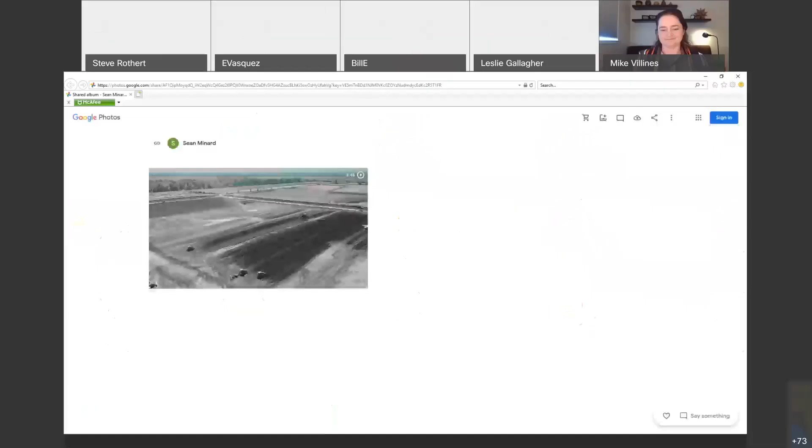Okay, members, we're back on item 8A, and this is a follow-up to the report Steve did on the Lower Elkhorn rehabilitation project that he was talking about. And here's a little video. Okay, Ryan, whenever you're ready.

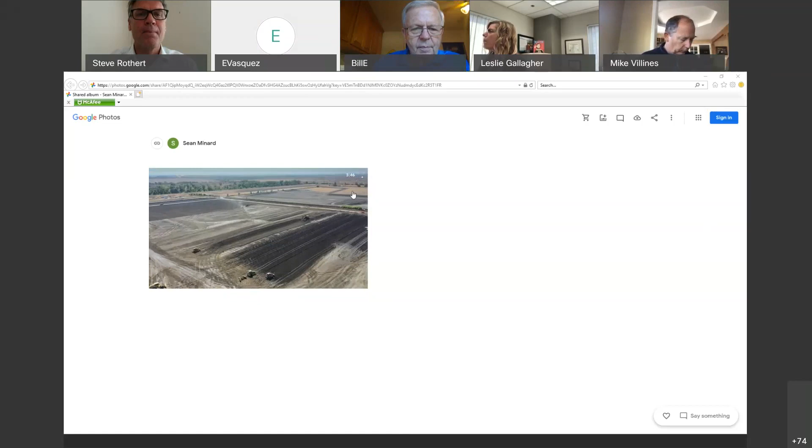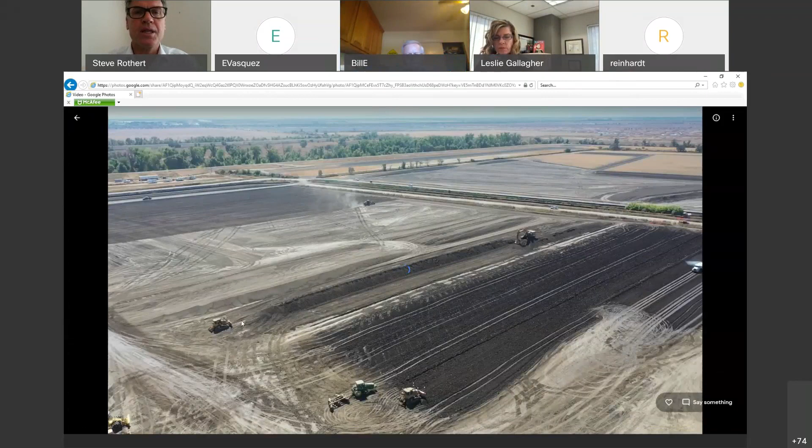So from this view, and hopefully it'll start moving, we are looking southwest with the vegetation in the background being the Barrow Canal along the Sacramento bypass and the northern levee of the Sacramento bypass.

And... let's see, I'm only seeing black. Others are seeing more. So the preview works, but when I go to play it, I'm not getting it. Well, I wonder. I don't want to take too much time. So yeah, it doesn't look like it's going to go forward.

But I'll just say two things about what we're seeing here in a loop. As I mentioned, the vegetation in the background is along the bypass side of the northern levee of the Sacramento bypass. Farther out, you can see a smaller strip of vegetation, which is the vegetation along the Tule Canal, so that's where the current Yolo bypass east levee is.

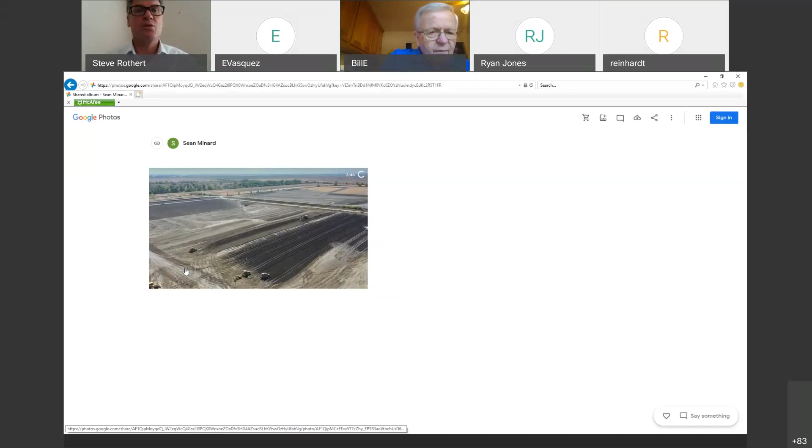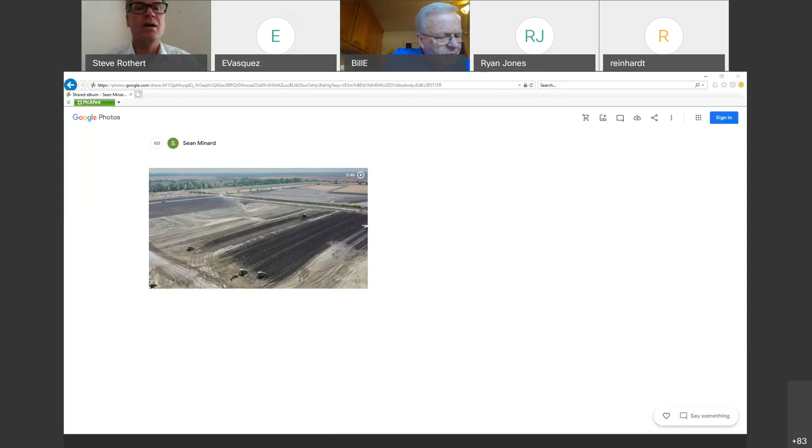So I think that's about all we can squeeze out of this for now, and maybe in future updates we can provide a better video of the progress as it goes forward. So apologies for the technical difficulties here, and I appreciate the opportunity to come back to it for at least a moment. Okay, thanks, Steve.

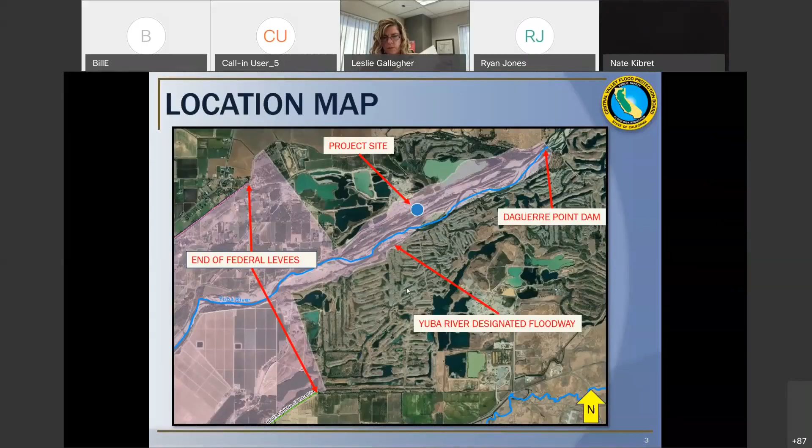With that, I would like to invite Chris Hammersmark, Director of cbec eco engineering, to present the informational briefing. Thank you, Nate. Good morning President Edgar and members of the board, thank you for the opportunity to provide this project update. As Nate mentioned, my name is Chris Hammersmark, and I'm with cbec eco engineering, we're the project designer. Before I provide a summary, I'd first like to ask Paul Cadrett from U.S. Fish and Wildlife to say a few words.

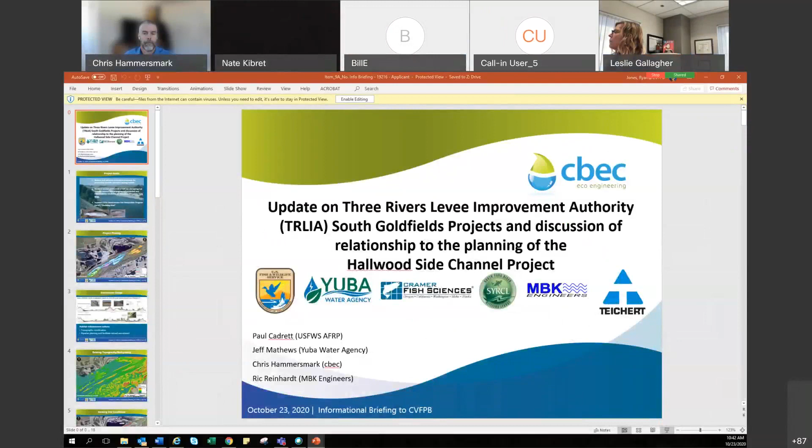Good morning President Edgar and members of the board, thanks for your time this morning. My name is Paul Cadrett, and I'm a fish biologist and habitat restoration coordinator with the U.S. Fish and Wildlife Service. I work for the anadromous fish restoration program under the CVPIA. The service is the permitted agency for the Hallwood Restoration Project and has been working with cbec for nearly 10 years, and has provided funding for project design and permitting, as well as a large portion of the implementation costs for phases 1 and 2. I have been managing the financial assistance agreements with cbec and am the lead Fish and Wildlife Service person on this project, and have been that for the last several years. So with that, that's all I have to say. Chris, back to you.

Thank you Paul, I'd also like to ask Jeff Mathews from Yuba Water Agency to provide a few words. Good morning everyone, this is Jeff Mathews, Senior Project Manager with Yuba Water Agency. We're very proud to be part of this project. We joined back in 2019 as the implementation lead, as well as a provider of financial support. We see great opportunities with this project through all 4 phases, providing substantial multi-benefits to flood protection, as well as great fish spawning and rearing habitat.

The goal of this project is to restore and enhance ecosystem processes leading to high-quality juvenile salmonid rearing habitat. In doing so, we aim to increase the natural production of fall run and spring run Chinook salmon and Central Valley steelhead on the lower Yuba River, just upstream of Marysville. This project, originally funded by the U.S. Fish and Wildlife Service's Anadromous Fish Restoration Program, supports the Central Valley Project Improvement Act doubling goal to make all reasonable efforts to at least double natural production of anadromous fish in California's Central Valley rivers and streams.

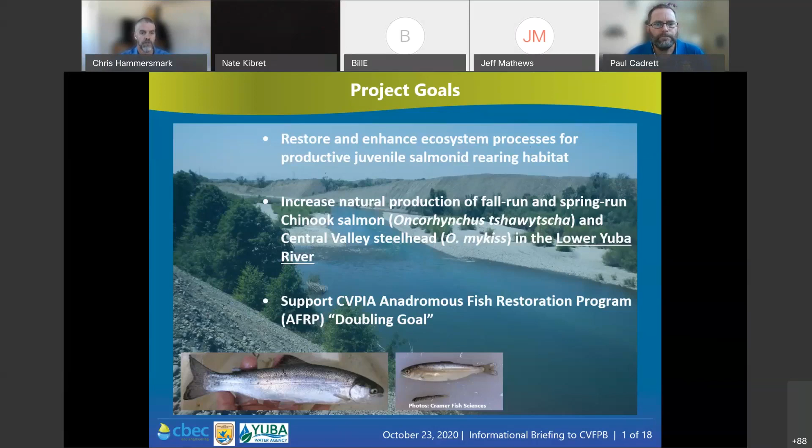Here you can see the overall project footprint, which has been broken into 4 phases, each feasible to be completed in 1 construction season lasting from about April to November.

Phase 1, currently under construction and shown in blue, creates or enhances 89 acres of juvenile salmonid rearing habitat. Phase 2, shown in orange, planned for implementation in 2021, is 34 acres of enhancement. Phase 3 in purple is an additional 13 acres, and Phase 4 in green is another 21 acres. Once fully implemented, the project would provide 157 acres of floodplain and riparian habitat enhancement on the lower Yuba River.

The project setting is in the highly modified Yuba Goldfields, with large man-made dredger tailings piles called training walls flanking the north and south edges of the river, as well as bisecting the floodplain and separating the main channel from its floodplain.

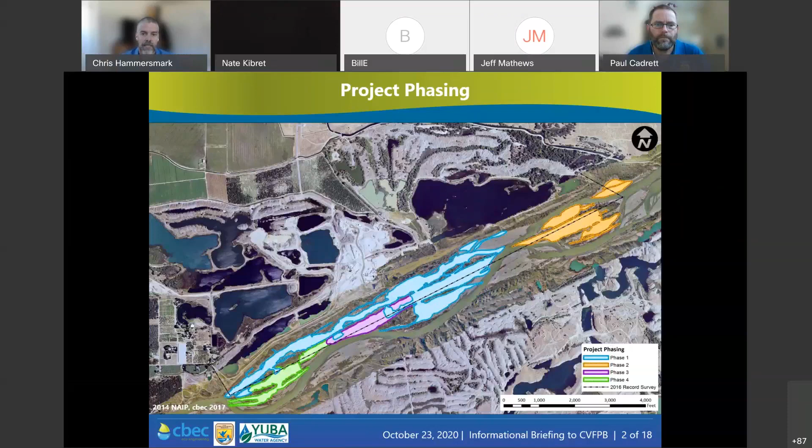The project was designed with the mindset that removing unnatural constraints to river processes will yield the greatest benefits. This graphic shows a typical section of existing conditions in the top panel and project conditions in the bottom panel. The main channel is on the left side, and you can see the 2 large tailing piles, together called the middle training wall, in the middle of the screen, which separate the main channel from the floodplain on the right.

A key habitat enhancement action is working with Teichert to remove gravel and cobble from the middle training wall, as well as other high elevation floodplain areas. We are also carving in a network of seasonal and perennial channels that will inundate across a wide range of flows. All of this is intended to increase the lateral connectivity of the river with its floodplain and increase the frequency and duration of inundation, providing rearing juvenile salmonids suitable habitat to grow larger and stronger before emigrating out to the ocean. We'll also be performing riparian planting, and the lowered floodplain areas are hypothesized to facilitate some natural recruitment of vegetation as well.

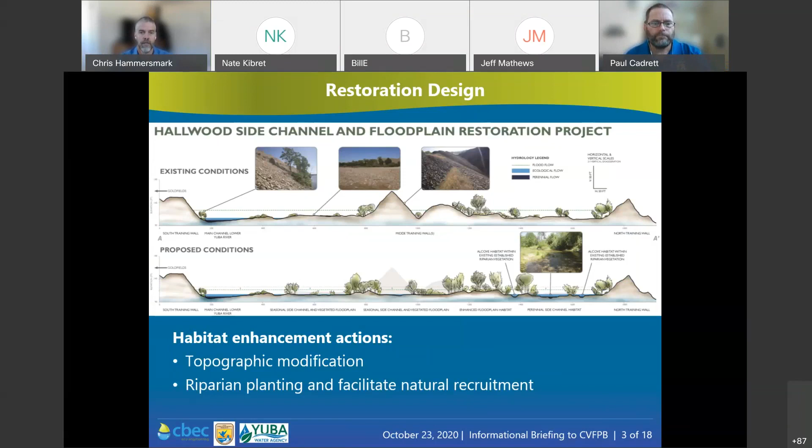Here you can see the topography of the site in its pre-project condition. It doesn't actually look like this any longer. Of particular interest is the middle training wall, running approximately 2 miles long down the middle of the river corridor, sitting anywhere from 40 to 100 feet above the surrounding floodplain elevations.

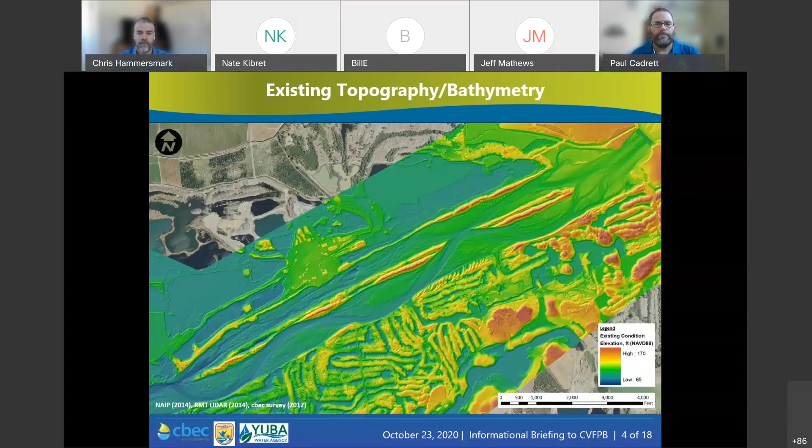This is the line running down the middle of the floodway, and you can see 2 ridges that together we refer to as the middle training wall. You can also see where a section of the formerly continuous middle training wall was naturally eroded away during the high flows of 2017.

This aerial image shows some of the key landmarks. The Daguerre Point Dam is shown in the upper right corner, along with Teichert's Hallwood Processing Facility to the north of the channel and the Goldfields to the south. We can also see the north training wall along the river right or northern portion, the middle training wall, and the south training wall, all designated with the red lines as shown.

At the downstream end, on the lower left of the overflow channel, you can see a series of large deep ponds, one of which has been named the Blue Lagoon, that in the pre-project condition provided habitat for predators of juvenile salmonids. You can also see the middle training wall running along the length of the site and the north and south training walls, which I already pointed out.

The video shown in the next slide is taken from approximately the location of the River Mile 10 marker shown in the middle of the slide along the middle training wall.

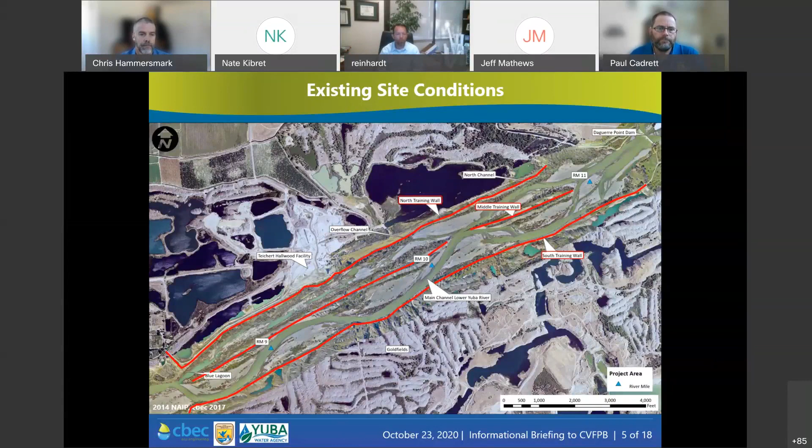If we... okay, it's moving.

This drone video is looking downstream and is showing the rough grading activities that occurred in April 2020, to lower the gravel bar along the main channel off to the left and make way for a seasonal channel in that area. Teichert Construction utilized push-pull scrapers and dozers to grade down and remove approximately 150,000 cubic yards of sediment from this feature. In the distance, you can see the conveyor system where a front loader is scooping material into a hopper and sending it directly to the processing facility.

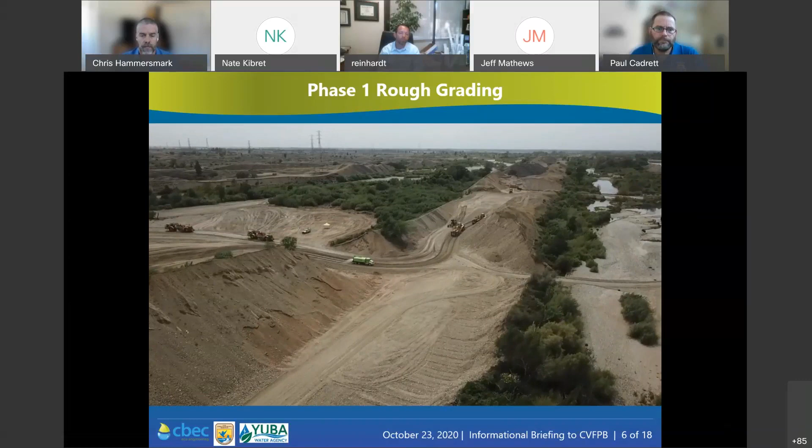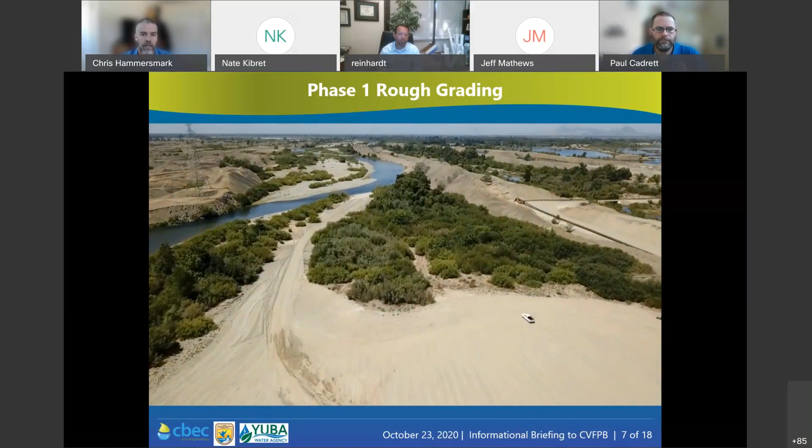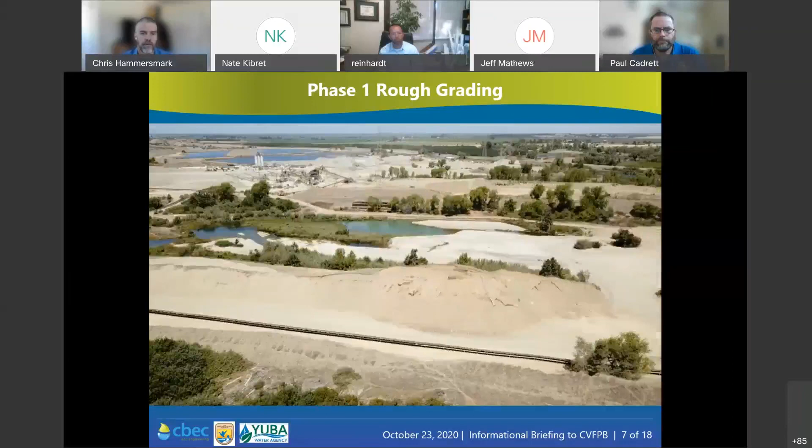This imagery was taken in early July of this year, right before fine grading of habitat channels began. You can see the result of the rough grading down the gravel bar along the main channel and the seasonal channel along the center. As we pan toward the middle training wall, you can see Teichert's conveyor system, which has been extended further to the east, or upstream, along the footprint of the middle training wall and the processing plant to the north. A loader is bringing a bucket of sediment to the hopper.

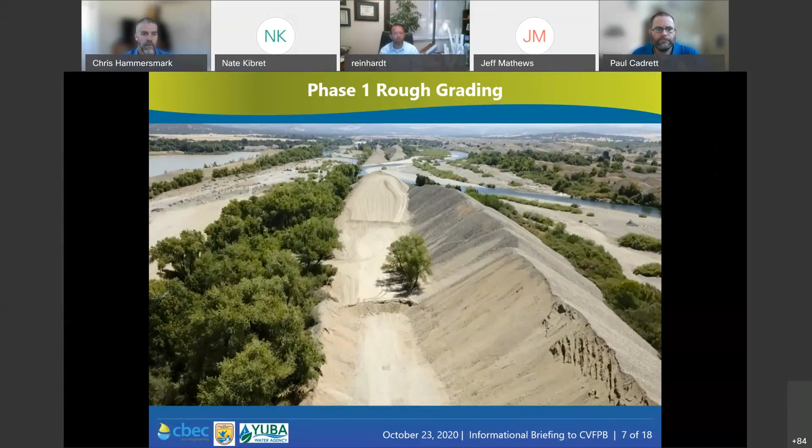Now we are looking east and upstream. Note the size of the middle training wall, or what's left of it. Off to the left, you can see the high and dry overflow channel that was rough graded down earlier this year to make way for the perennial channel and floodplain in that area. The perennial channel will disconnect when the river drops to spawning flows late in the summer, but will remain connected to groundwater through an infiltration gallery at the inlet.

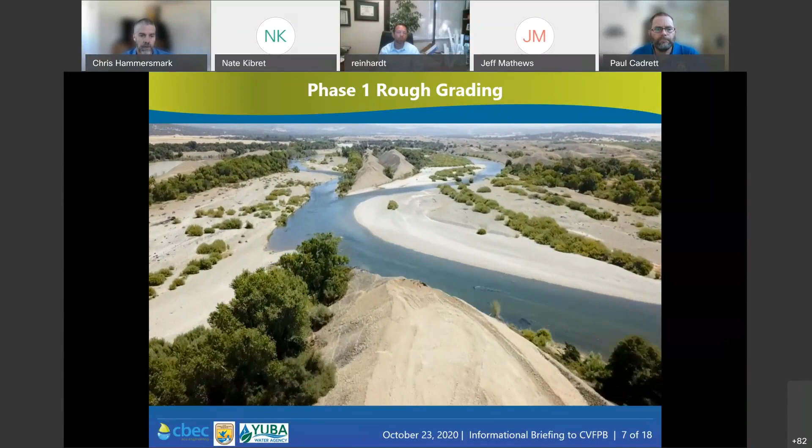Further east, you can see the phase 2 area and the 2 middle training wall ridges that will be removed in the next phase to increase lateral connectivity there. On the bottom left, and this, as the video stops, is where the inlet to the perennial channel is shown.

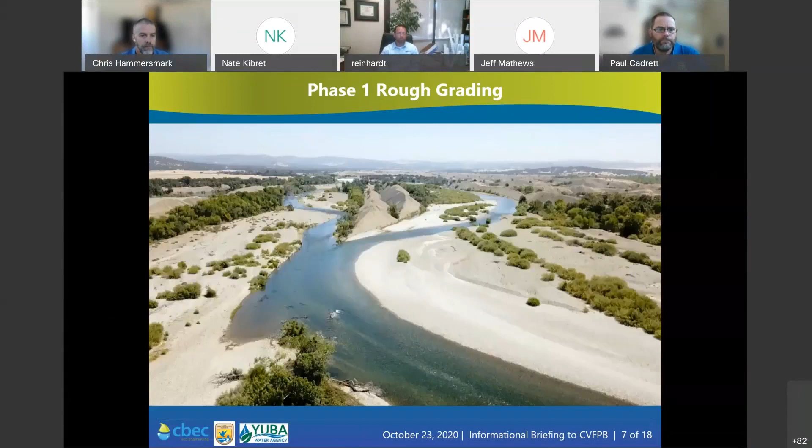Here we see the interim conditions as of September. We can see that the perennial channel, which has been carved, is well connected to groundwater and does not have a surface water connection at the upstream end at this point. Fine habitat grading has occurred and will continue into October. As we move upstream, we can also see alcove features on the right and left banks, which carve channels into existing mature vegetation to provide high quality habitat immediately once the project is opened up.

This is the rough grading. Fine grading is actually being completed right now as we speak.

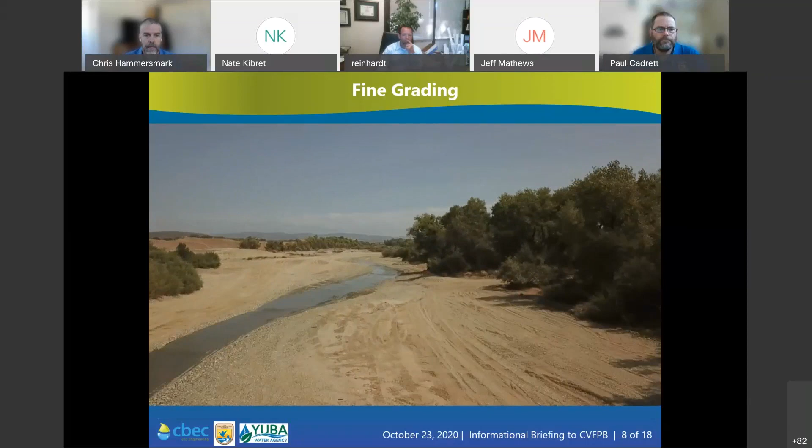Phase 2 of the application, or our phase 2 application, sorry. Let me move my notes out of the way. I apologize.

Our phase 2 of the project includes 34 acres of enhancement, which includes approximately 800,000 cubic yards of sediment removal. It will include 1.5 miles of seasonal channels to be created, as well as approximately 1 acre of riparian planting.

This next phase, as with phase 1, is funded by both U.S. Fish and Wildlife Service and Yuba Water Agency.

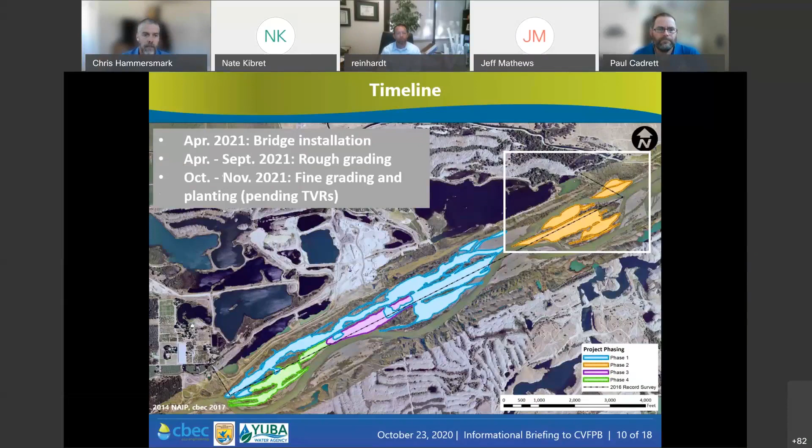Next slide, please. I'll now pass it over to Rick Reinhardt of MBK Engineers to provide an update on 2 important adjacent projects. Good morning, President Edgar, Vice President Dolan, members of the board. Rick Reinhardt with MBK Engineers.

When the board first issued its permit for phase 1 of the Hallwood Side Channel project, we knew that there was flood risk associated with failure of the north and south training walls. And at the time, there wasn't certainty about how that flood risk was going to be addressed.

But since you issued that permit in 2017, Three Rivers, with the support of DWR, secured funding for construction of the Goldfields South Levee. That project is now in construction. It's a 2.6 mile setback levee. It's going to be completed next month. And that, as I know you're very familiar with this project, completes the final phase of the Three Rivers program to provide 200-year protection of this area.

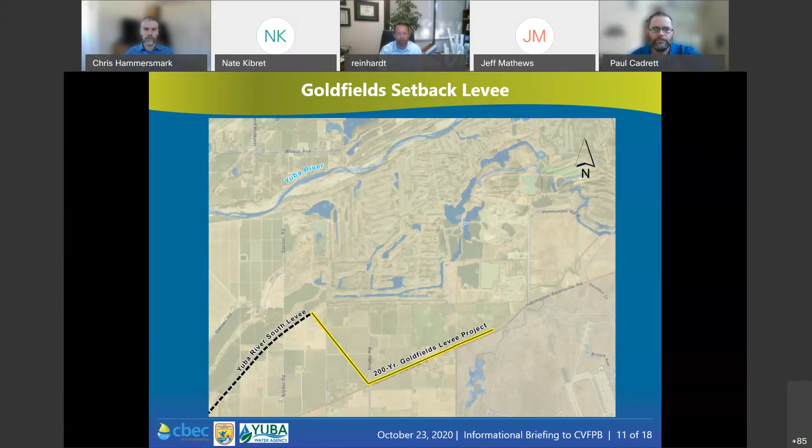Next slide, please. What you might not be as familiar with is the North Training Wall project.

With the areas mined out on the north side of the North Training Wall, if the North Training Wall fails, the floodwaters go into the community of Hallwood. It can lead to failure of the Panhandle Levee, increasing flood stages on both the Marysville Ring Levee as well as the District 10 Levee.

Three Rivers, with $1 million in grant funds from Yuba Water Agency, is proceeding with a project to design that North Training Wall to meet 200-year standards. But because we're in a unique situation where we're working with an existing training wall and have ample material available, we're going to design it to the 200-year water surface plus a foot, and the top of the embankment will be set to contain the 500-year flood event.

We're pursuing both state and federal grants for implementation of this project. Our goal is to be in construction on phase 1 of the North Training Wall in 2021. Phase 2, which will be needed to meet the ultimate FEMA certification, is to extend the North Training Wall upstream to high ground, and that construction would occur in 2022 or later.

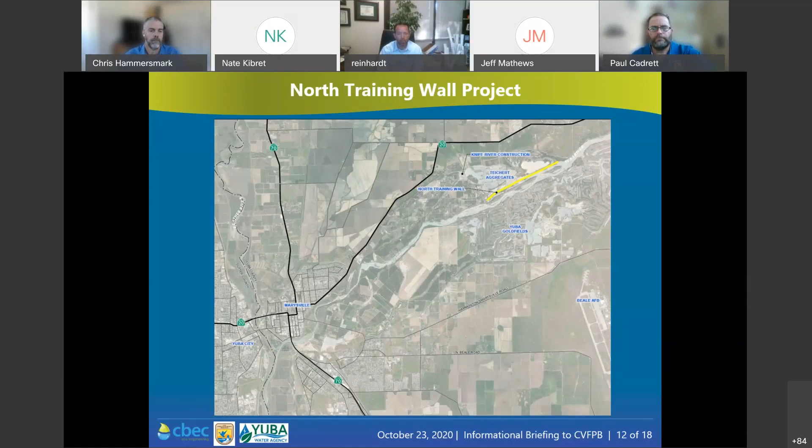So President Edgar, you started by asking for a little background because you've got new board members who might not be as familiar with this. I think there's value in telling a little bit of the story of how we got to construction.

When this project was permitted in 2017, the partnership was with an NGO, SYRCL, U.S. Fish and Wildlife Service, CVFPB, and Teichert.

In May of 2019, this project was on life support and within a month of death. That death was going to occur if Teichert moved its asphalt plant from the Hallwood mining facility on the north side of the North Training Wall.

That Hallwood plant was mined out for aggregate. And if they moved the asphalt plant to the Marysville site, it would no longer be cost effective to remove the 3.2 million cubic yards of aggregate from the river that makes this project possible.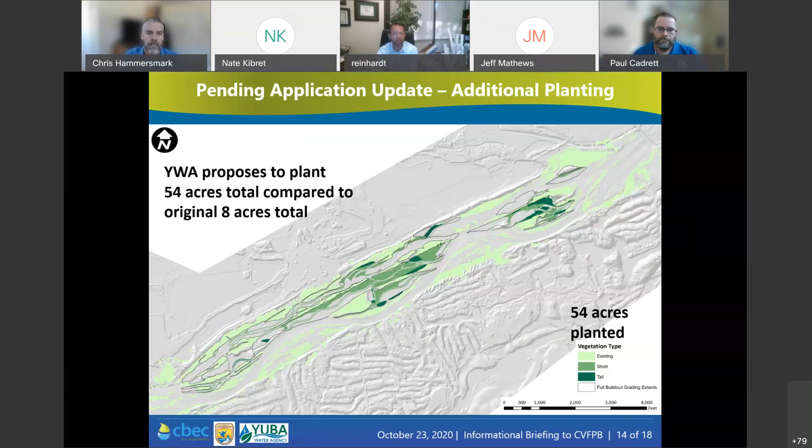So even with the additional planting, we are still seeing substantial reductions in water surface elevation and fairly similar or nearly identical increases as were included with the previous plan.

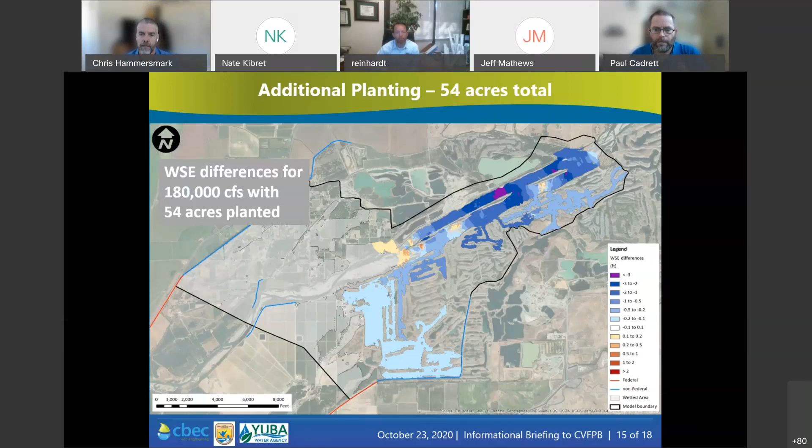This shows the difference between the original planting plan of 8 acres and where we currently stand with the proposed 54 acres. The addition of 46 acres of planting has slightly reduced the amount of water surface reductions. However, all of the increases are in areas where we saw dramatic reductions in water surface elevation, such that even with this additional planting, the project is still substantially lowering water surface elevations and is not posing any additional flood risk compared to the initial plan that the board had reviewed and approved previously.

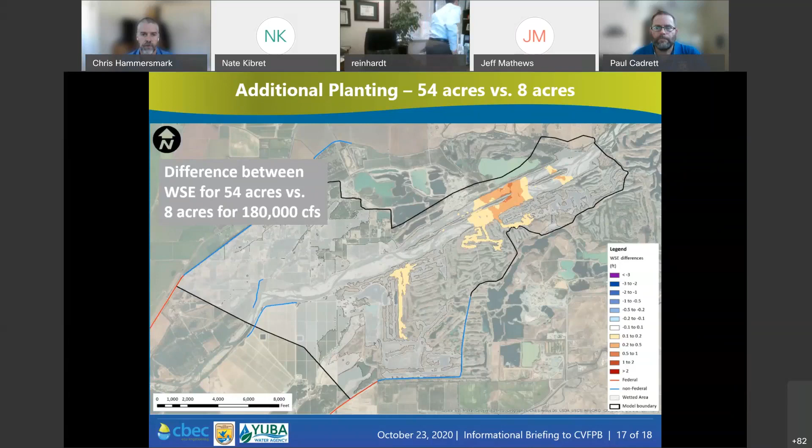I should also note that the 54 acres of planting is what the North Training Wall team and the project Rick was previously discussing has been designing to. So they are already taking into account this additional planting as they set their levee crest and freeboard elevations.

With that, I'd like to thank you all for the opportunity to present, and we would be happy to answer any questions you may have.

Okay, members of the board, questions at this point?

Well, I just have a comment. I think this is an incredible project, like Rick Reinhardt mentioned, coming together to solve a problem that helps the environment and helps the flood project. I'm just really astounded by it, and I think it's great work.

Joe, on the issue of having somebody be responsible for long-term maintenance, I'm not concerned right now because I think the project's not going to require much maintenance except maybe someone to take a look at it and make sure it's operating well. But I'm thinking long-term, down the road 20 years, 10 years, whatever, we need somebody to be responsible for long-term maintenance, a public agency that would at least, if problems occur, sloughs on the levees, whatever's happening, take charge of and be responsible for raising problem areas we could resolve down the road.